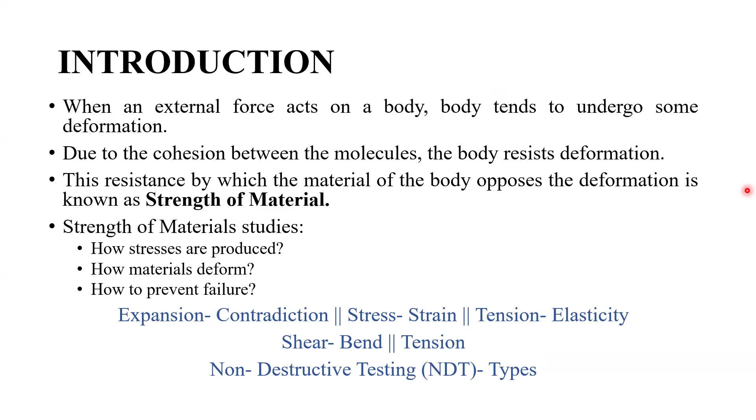So now we'll go ahead with expansion and contraction, specifically thermal expansion and thermal contraction. Whenever we cross bridges like flyovers, while traveling by car or bike, you get a sound whenever you travel on bridges. That bridge is actually built in parts, not a normal stretch road.

For example, 250 meters of bridge will have at least five parts, so it will have five parts of 50 meters each. In each particular part, there will be particular spaces, like this, between them.

These spaces are made because during the summer, the bridges are going to expand. The same way, your railway tracks - you get a sound whenever the train goes on the track. During summer you'll have that sound, but not during winter, when you'll have the normal sound. This is because during summer it will be loose, and during winter it will be strongly gripped and expanded.

So expansion is when the material is heated, exposed to heat. The melting point of iron or steel being used could be 1100 degrees Celsius, but that's not required for a bridge, because the temperature is only around 30 or 45 degrees Celsius. It gets heated over a period of 3 or 4 months, so the iron material in between gets expanded.

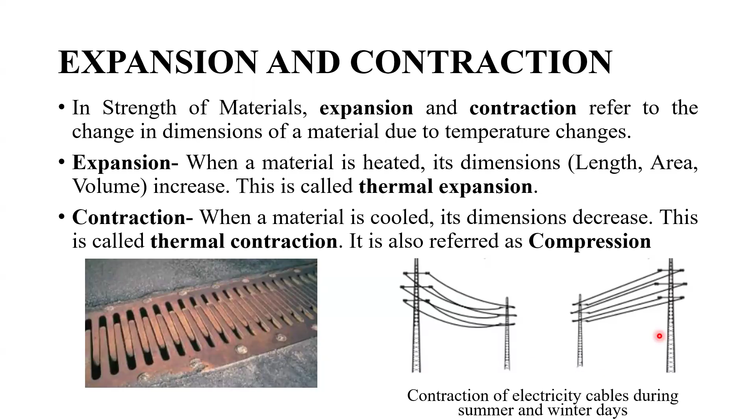So wherever materials have been used, you have to know the melting point and their characteristics, and you have to act according to that.

Then we'll come to stress and strain. Similar to the psychological term - I'm having a stress, I have lots of work, I had stress - in physics terms, stress is stated as the internal force per unit area inside the material caused by an external load. So you get tensed when you got stress, you get moved inside the material, caused by an external load, which might be because of your workload, or from your parents and whomsoever.

So we'll just compare that same thing to here. Stress is an internal force per unit area, which can be measured in any unit area, like square feet, centimeter square, cubic meter, whatsoever.

That particular unit area differs from place to place depending on how much area is being acted upon. If I'm going to punch it, it's like 4 by 4 inches acting there, so I'll go ahead with inch square. But if hydraulic pressure is put on materials like iron, you won't be able to use inch square because that area is comparatively larger, so you use Newton per meter square instead.

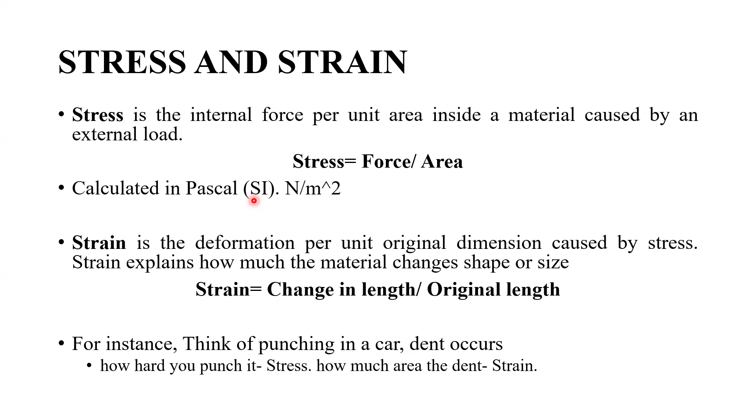So same thing with tension and elasticity. I'll explain with examples. When it comes to tension and elasticity, it seems the same, like a common normal thing.

But there's a minute gap there - tension is the force being acted from outside. You're going to pull the box, push the box away, or tie a rope on the box, maybe using a crane. So the force you use to pull that particular 500 kg box is tension. Tension is nothing but what happens due to external force.

Elasticity is nothing but what talks about the characteristics of the particular material. For example, you have a rubber band - you are the external force giving the tension, but elasticity determines the particular characteristics of the material.

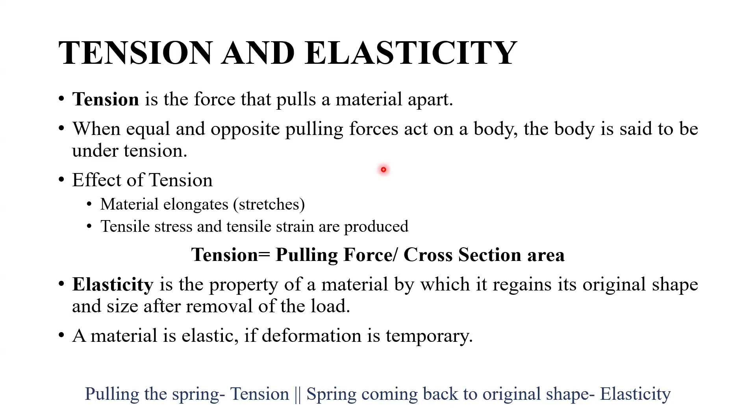So we'll get back to shear and bending. Shear is nothing but, there won't be any single external force - there will be two forces acting accordingly. With the same force, two materials will be acting upon each other. Same like scissors, whenever your thumb finger and index finger act with the same force, your material changes its position.

It is not going to get destroyed, your scissor is not going to get destroyed - that's not the concern, but still your normal position is going to get deformed. That is what I look into as strength of material, scholars. You have to understand, the particular scissor, when you move it with force, your normal shape is going to get changed or deformed. That is what is called shear.

When it comes to bending, same like... so there won't be any top force. Let me explain this bending later with an example. I'll get back to bending once after completing the pictorial representation.

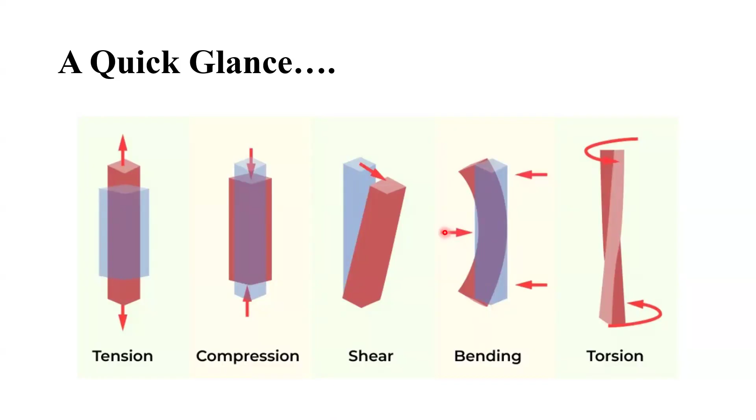Shear is nothing but deforming the particular material in order to attain some other shape. Bending, same thing as I said. When it comes to compression, it is like top and bottom acting, but when it comes to bending, it will be acting in the perpendicular direction. So your compression acts in between, whereas your tension occurs from top to end - that is what has been explained here.

Bending occurs when the load acts perpendicular to the length of the beam, causing it to curve. It might get back to its original position, as explained in the last point - temporary deformation or permanent deformation. Whenever you bend a steel scale till a particular position, it will get back to its normal position. But whenever you bend it more than its limit, it will be deformed permanently.

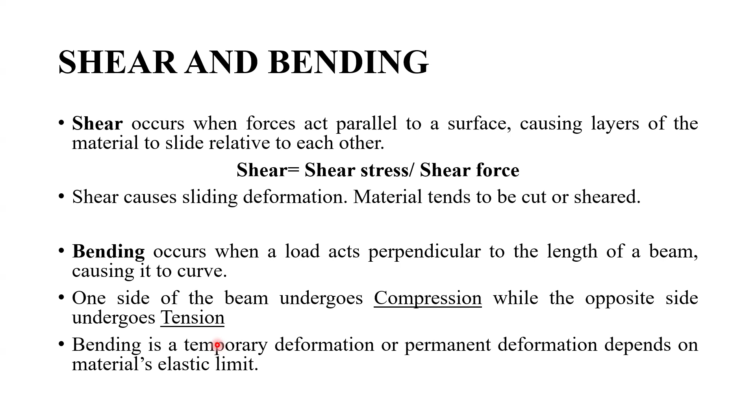So these are the main forces which have been acting on the materials so far. These are some normal ones, not much used, but still you wanted to know: bearing, buckling, impact load, fatigue.

Bearing is nothing but your rivets. You have two materials on top and bottom, and you press it together using rivets, screws, nuts and bolts to punch a hole. You have to know how much force is needed to make a hole in a particular material. For 2 material, the force could be lesser and you can punch it with a normal handheld punch. But for 10 material, the force has to be higher, so hydraulic presses or hydraulic punches have to be used.

So how much pressure do I need to use? Getting back to that Newton per meter square, the same concepts apply here. Two materials are going to be attached together, punched or joined through rivets, screws, or nuts and bolts.

Buckling is related to the rubber scale many of you may have used. There's a non-breakable rubber scale because iron scales were not allowed in school, as they might damage someone, and plastic scales used to break, so your parents would scold you. That's when the rubber scale came in, made of a springy material.

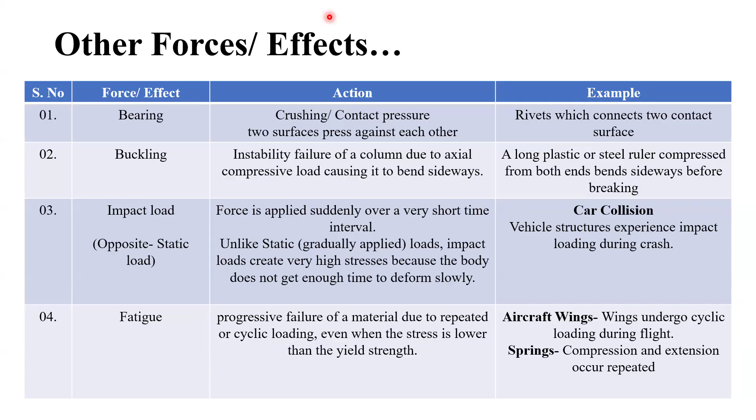Fatigue: people who have traveled by flights and had a window seat near the wings would have seen the wings flapping in a to-and-fro motion, up and down. That is called fatigue. Even that has a particular limit - after 1,000 times, 10,000 times, a lakh of times, the wing undergoes fatigue because at a particular moment your material is going to lose its strength.

Now we'll get back to the third question we discussed: why strength of materials?

So factor of safety is nothing but the maximum strength of a material divided by the actual working stress applied to it. For example, if the maximum strength of an iron scale is 10 Newton per meter square, and you apply 12 Newton per meter square, it is obviously going to break. So you have to know that for this particular material, 10 Newton per meter square should be the maximum force applied, and you have to act accordingly.

Same like that, it provides a margin of safety. If 10 Newton per meter square is my margin of safety, I should not apply more than that, even not 10.1 or 10.2. Right now it may not get affected, but maybe in later days it will get affected.

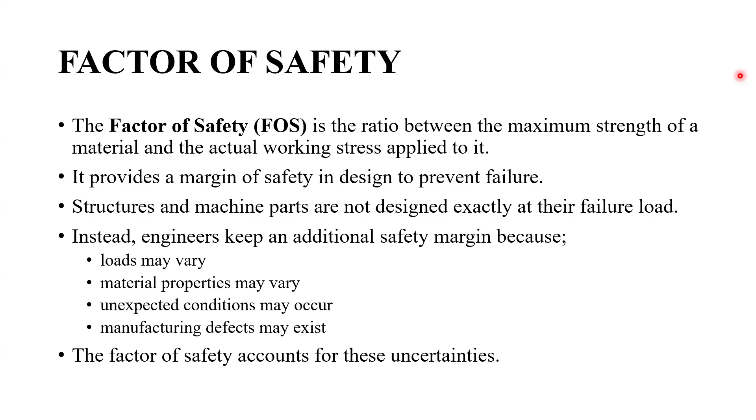So we'll get back to the second part, which is non-destructive testing. There are actually two things called destructive testing and non-destructive testing. Destructive testing I will cover last. For non-destructive testing, you are not going to damage the particular part.

You know that a particular steel scale is going to have stress of only 10 Newton per meter square, but it's human nature that everyone wonders, what if I apply 12 Newton per meter square? What is going to happen? Let me see, let me try that. But NDT is all about inspecting the material without causing damage to it.

You are going to inspect that material for shape deformation, any dent caused, or even when going ahead with welding, some places welding would have been missed out because in that bright welding light you could not see those particular places, whether they've been sealed or not. Only once it has cooled could you come to know, so we cannot take the decision that we've made a proper weld. That's why NDT is being used.

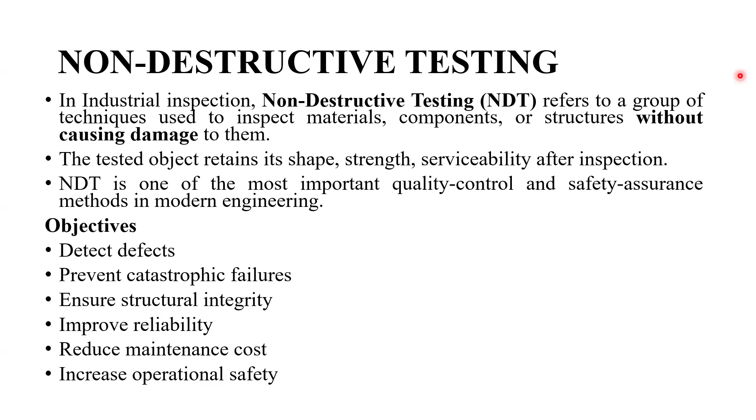So why is NDT necessary? As said, for cracks, voids, porosity. Same way, when going ahead with welding, the outer layer will look normal, but inside there will be porosity, a gap, an air bubble formed. Whenever you paint cars, you'll have air bubbles inside. That is what we want to know about. But with painting, we couldn't do NDT. For materials we have, we can do NDT.

So the main things we have in NDT are four types. There are around 12 to 15 NDT tests being done, but we are right now looking at four tests, from basic to advanced method. So for the slides, we'll be looking at four types: visual testing, dye penetrant testing, magnetic particle testing, and ultrasonic testing. So VT, DPT, MPT, and UT — these are the normal abbreviations used.

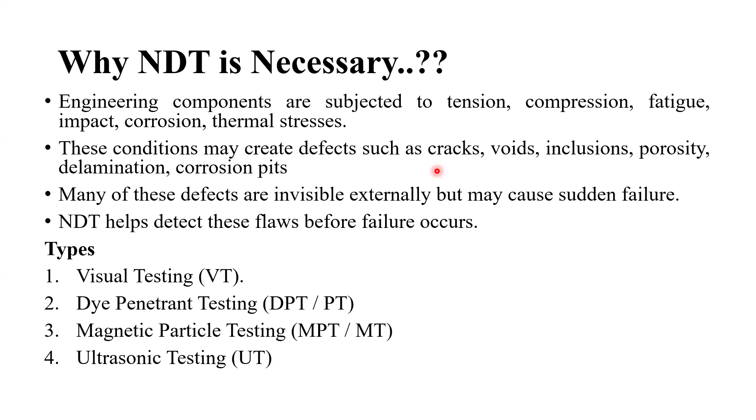So visual testing is the simplest of all NDT methods. Anyone could find it. You can say this particular material has a dent, or they haven't polished it properly, or they have an air bubble. With your naked eyes, or cameras, or magnifiers, without using any electronic or electrical items, you could come to the conclusion by touching it or seeing it that this particular material has got damaged.

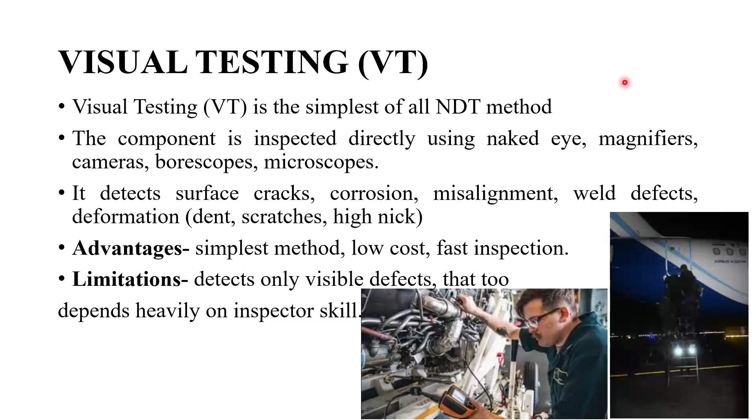So the limitation is, defects can only be seen with the naked eyes as visible defects. We cannot see what is happening inside. If you have a 10 mm plywood, you cannot see whether all the places inside are sealed properly. Sometimes there will be a gap inside that has not been properly stitched, and it will only be visible on the top layer, not on the bottom layer. So, dye penetrant testing.

So it is somewhat advanced compared to visual testing. Whatever we go further will be advanced compared to each and every testing. Visual testing is the basic thing, and when you come to DPT, you are going to find the new cracks.

Now with the visual inspection, you have found that you have a crack over there, but you cannot put your scale or any other measuring instrument to know how deep the crack is. So that time we'll go ahead with the DPT.

Remove the excess penetrant, same like that - you'll wipe off the layer. You'll be having some excess penetrant laid over there, so you have to clean that.

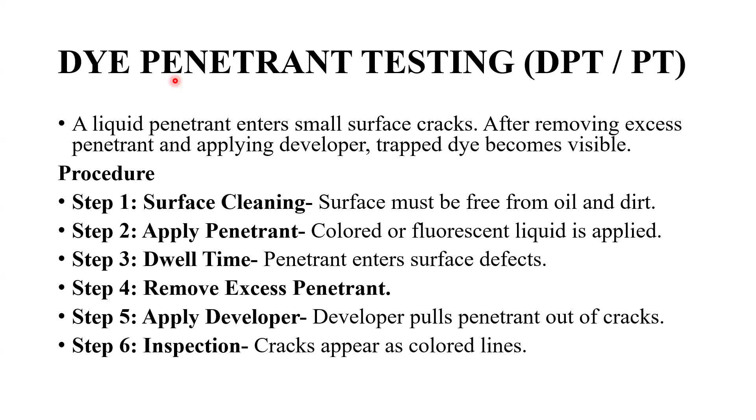Now we are going to apply developer. I'll explain on the next slide why developer is important. For the inspection, the crack appears on the colored lines.

So as of now, even at the fourth stage itself, after applying the penetrant, I could find where the crack is. But still, after applying the dye developer, I'm going to get the exact crack location. It will be highlighted, same like this.

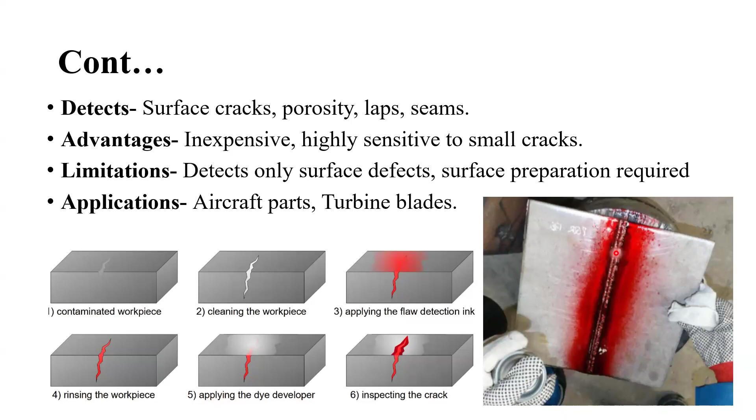Same like this, it is also going to detect only surface defects, but still you could mark where the defects are and how deep they are. So you could find out when your cracks or dent is cut from the outside layer, not from the inside mid part.

So, MPT. This MPT can only be done for ferromagnetic materials. Ferromagnetic is nothing but whatever material your magnets are going to get attracted to. Aluminum is not a ferromagnetic material because it is not going to attract any magnetic materials. So MPT will only be used for ferromagnetic materials, like for example iron, nickel, cobalt, steel - these are the ferromagnetic materials.

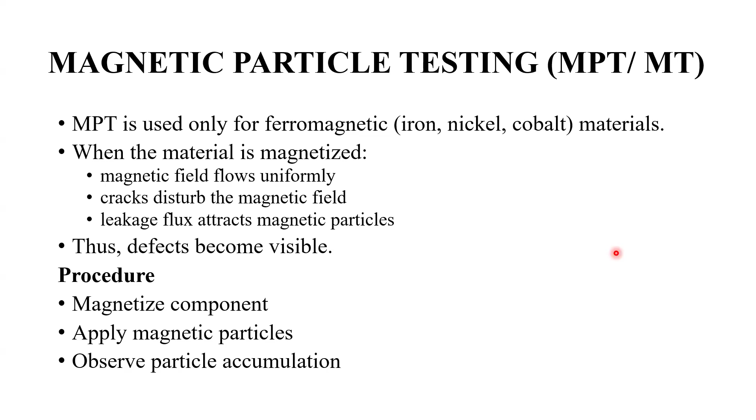I'll explain with an example. Right now I have a crack inside. Same like that, in the rest of the places, I'm going to have the North Pole and South Pole. This is a North Pole and this is a South Pole, so you are going to give a magnetic induction over there in the particular places.

If there are no cracks, it will be on a straight line. If there is a crack, your magnetic path will be deflected out of that particular area, so you could know how deep the crack is - same like your dye penetrant testing, but without using any dye penetrant, you just apply the MPT on top and find it out.

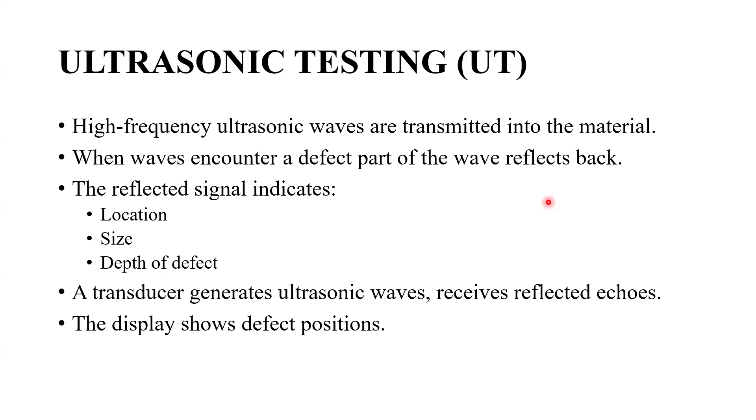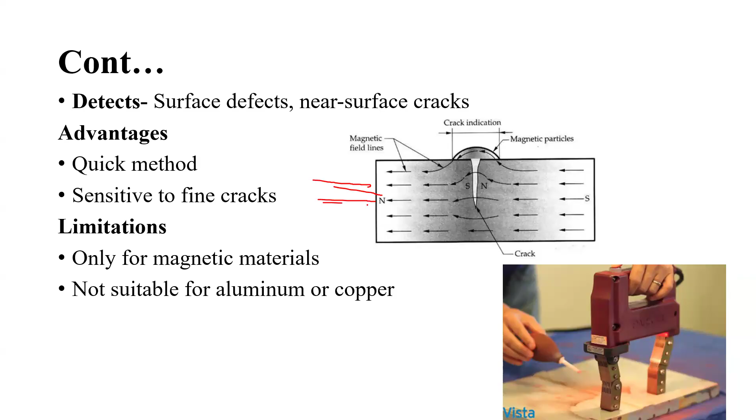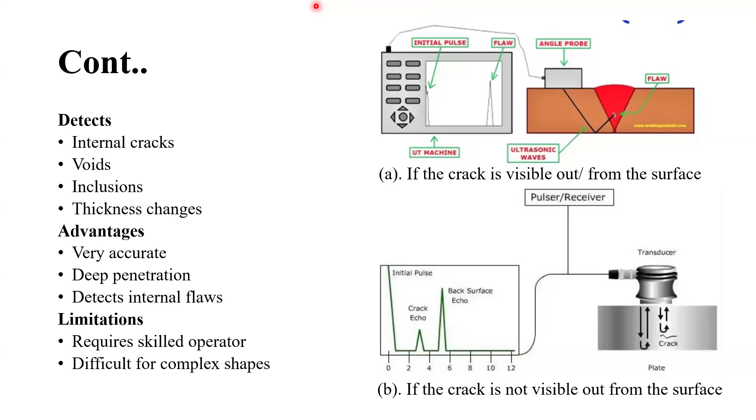This is a small difference between the two methods. In MPT, you'll be having the magnetic field, whereas in this one, you'll be having the sound waves. More advanced methods are there which use radioactive materials as well. So right now I'll differentiate MPT versus UT.

MPT uses the magnetic field, whereas UT uses the sound waves. So MPT detects only surface or near-surface defects, whereas UT can detect defects like porosity, a hole, or something not fixed in the middle of the material also, and let you know.

MPT works only on ferromagnetic materials. Magnetic particle testing will work only on ferromagnetic materials, not on others like wood or plastic. You cannot do MPT on them, but UT works on most materials like wood, plastics, and even aluminum, which is not ferromagnetic. Still you could use UT for aluminum kind of things.

MPT uses magnetic particles, and UT requires electronic equipment like a transmitter and a receiver. The transmitter will transmit the sound waves from one end, and if there is a crack, it is going to reflect the sound waves back to the receiver. So that's what you require, both of these things.

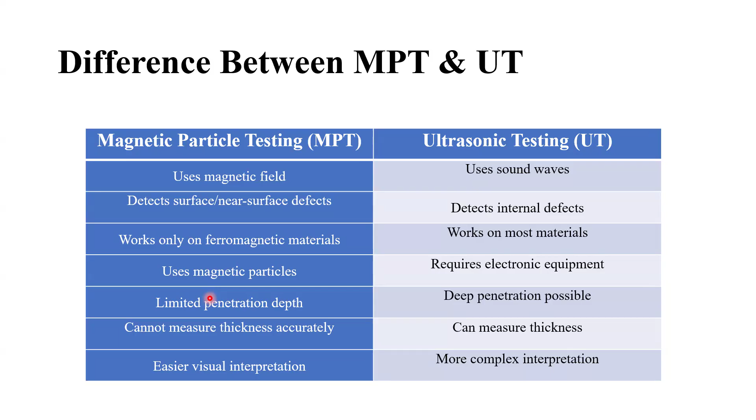You have to run your UT machine throughout the entire length. If you have 500 meters of iron ore or iron sheets, you have to run it all the way for all 500 meters. Only then will you come to know which particular place has the defect.

Other entities have been used, but not in normal regular usage, like radiographic testing and eddy current testing. Ultrasonic testing, as I said earlier, that one is based on sonic waves, sound waves, whereas eddy current testing is based on current.

And leak testing. Leak testing is nothing but you close a jar and put some water onto it, similar to checking a puncture. Whenever you have a tubed tire, once the puncture is resolved, you find out whether there is any leakage, whether air is leaking from another place. That is normally called a leak test.

If you want, I'll put you in a separate class for destructive testing. Destructive testing is different from non-destructive testing - in NDT you don't damage any material, you find out the defect in that material. But in destructive testing, you will be damaging whether that is a sample material. For example, if I have a 500 meter sheet...